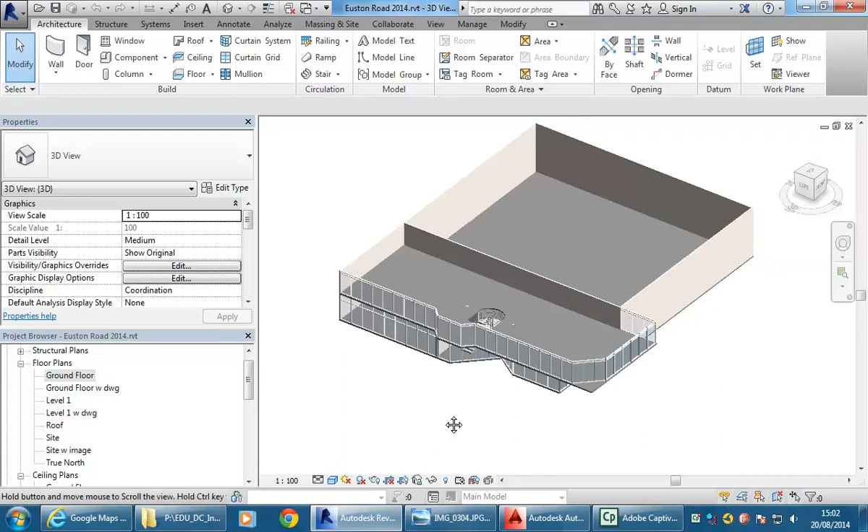Oh, sorry guys, over there, can you just keep it down, Priscilla. Sorry, I can't see. Just keep it down a bit.

Okay, so with the roof on, we'll have an enclosed space, and then you can go back and refine the details and correct everything that's wrong, and there's a lot wrong at the moment.

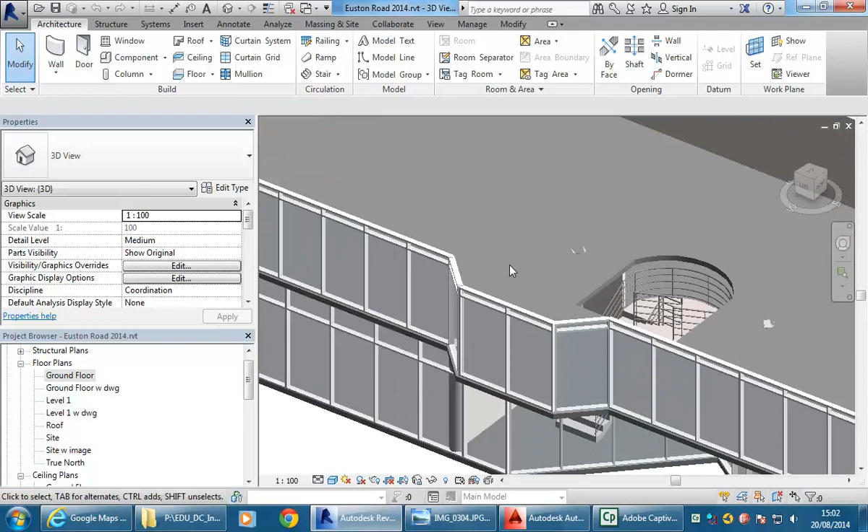The first thing you'll notice is that the walls coming out around the balcony shouldn't be there, so I'm going to delete those before doing the roof. You'll need additional walls set back from that edge of the balcony, and I'm going to go ahead and draw those in with the wall tool, again using storefront for now.

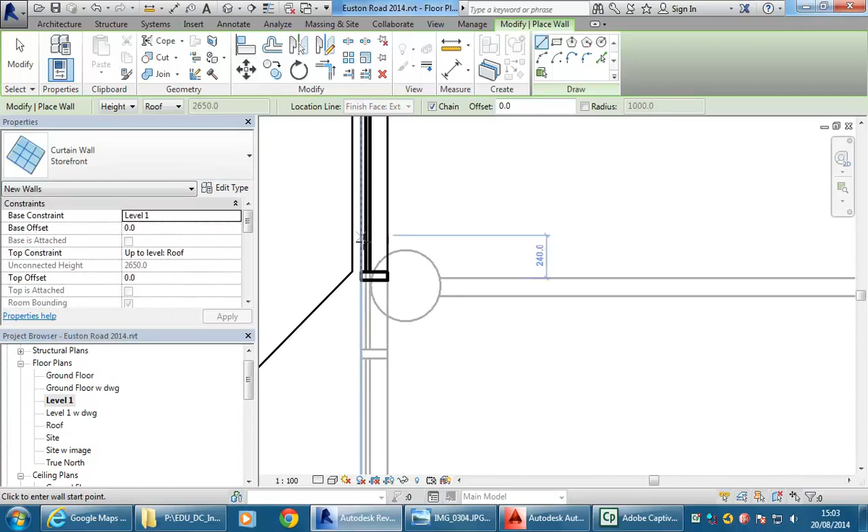We'll modify storefront to make it into the curtain wall you need in a little while, but for now I'm just going to draw from the end of my existing curtain wall, making sure I use space as necessary to flip the direction of that curtain wall.

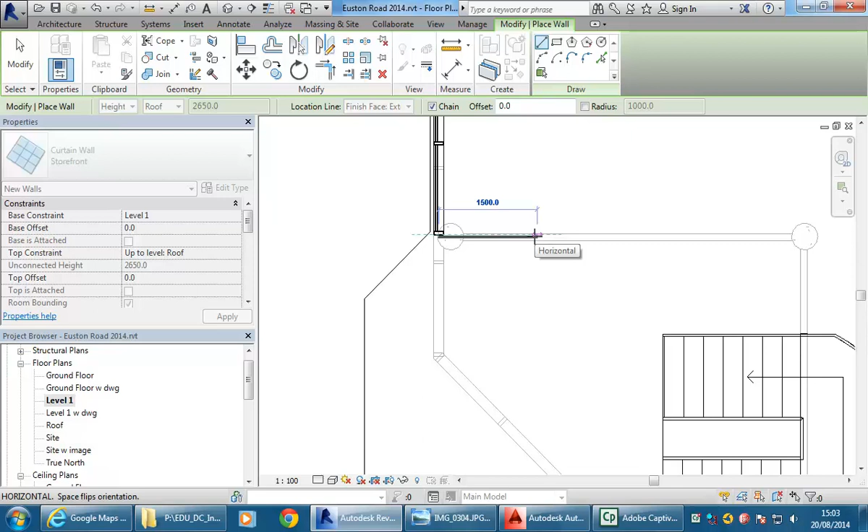Because we don't have any accurate measurements for this, I'm going to do it by eye. You can see it's roughly 1.5 meters set back from the front wall there, coming down and then back to the left, and that will help me with the roof.

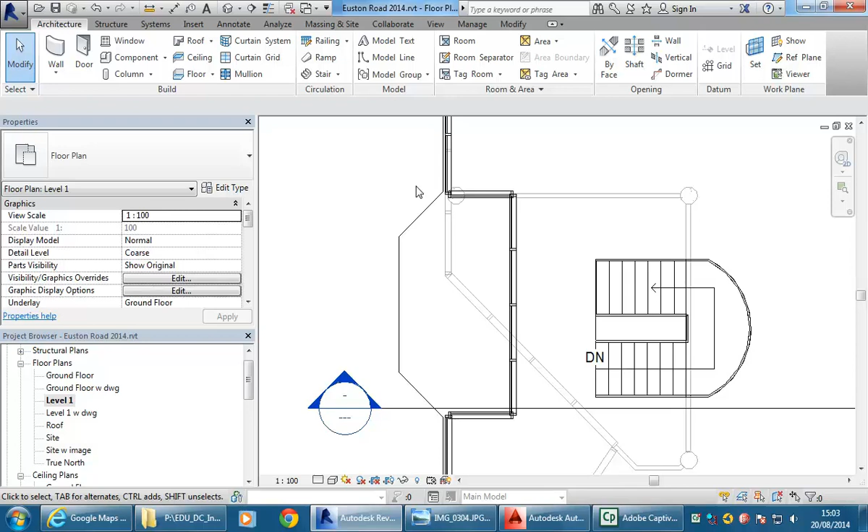Right, so while I'm at it, I might just show you a little thing with curtain walls, and I'll do a whole video on curtain walls after this, because I know you need to do quite a bit with those.

Maybe you're aware that with these curtain walls, when they join at a corner, you'll often see the mullions come up like this, and I don't know if I've shown you much with corner mullions. No, not really? No, good, okay.

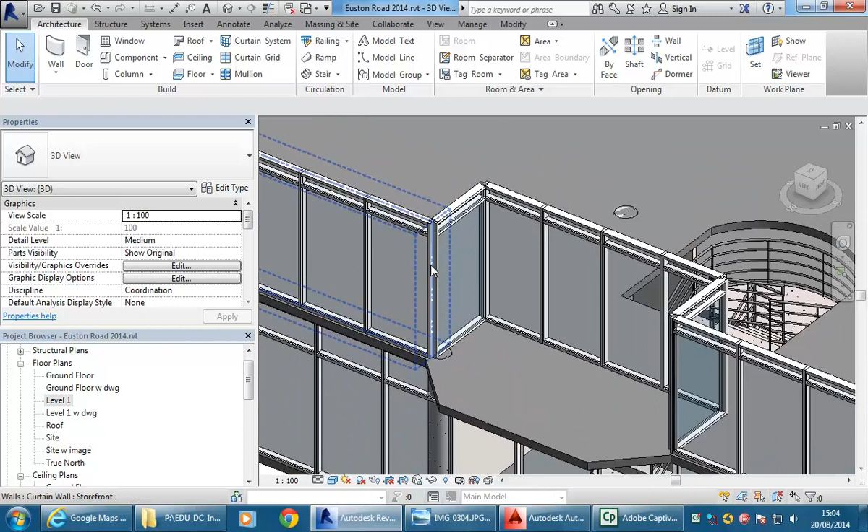So storefront, if you don't know, is a pre-built curtain wall set up with mullions and panels that are predefined. If you select any mullion, for example, you'll see it's pinned, which just means it's predefined as part of this storefront curtain wall.

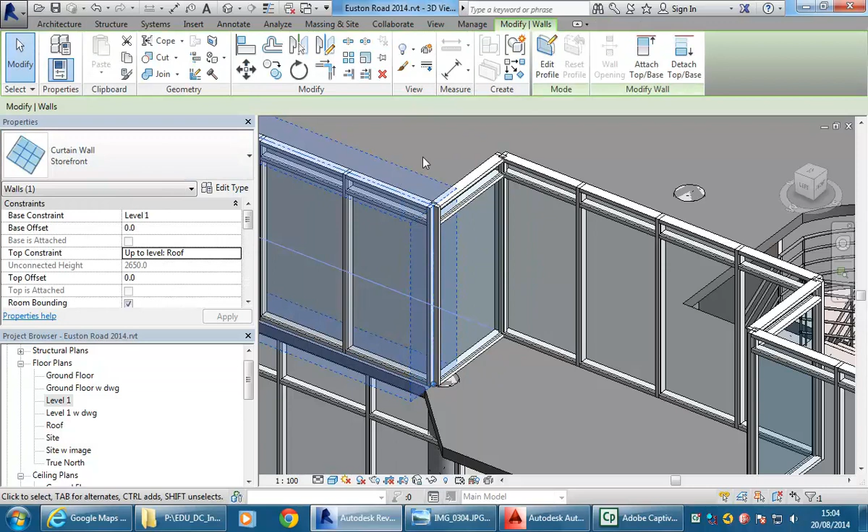Okay, so that's fine. I'll use tab if I need to select just the mullion, and I'm going to select the one above as well, using control to select that mullion in line with the one below. You can see they're both pinned - they come up with this pin icon.

So I'm going to unpin them on the Modify tab. You can see in the Modify panel it gives you this little pin icon with the cross. That means I can then modify them, and I'm going to delete them - with the delete button, I can take those two mullions away.

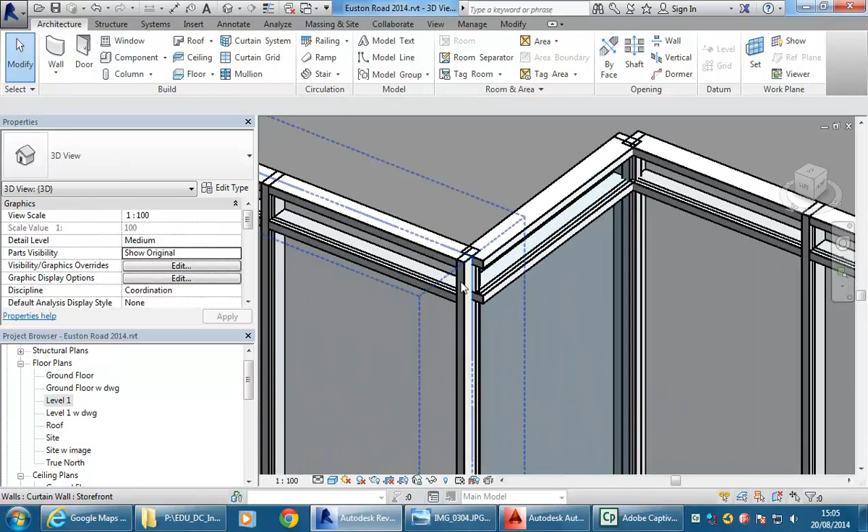So now I'm just left with one mullion on that corner. Then I'm going to select those mullions that are left - again, use tab if you need to highlight the one you want before using control to select it. And again, they're pinned, so I'll unpin them.

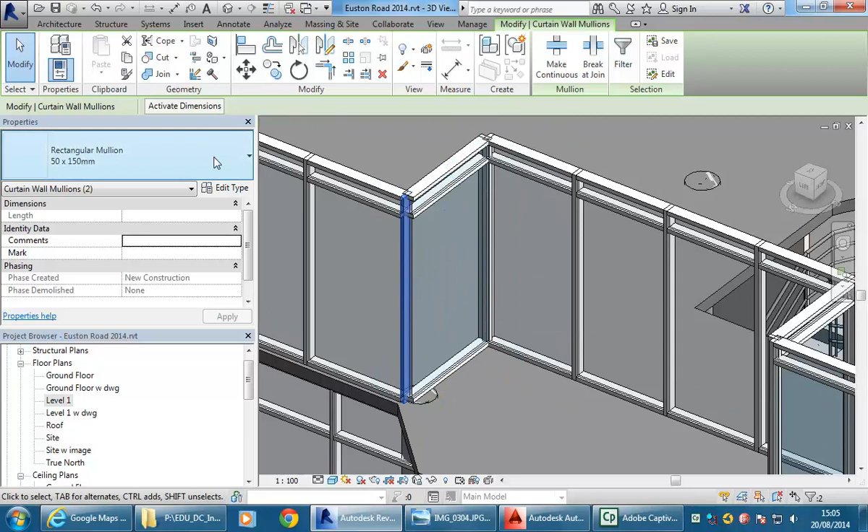Now, instead of deleting them, I'm going to change them in the Modify panel to a corner mullion. You'll see there's a quad mullion option. And now it joins correctly, and you can do that at any corner.

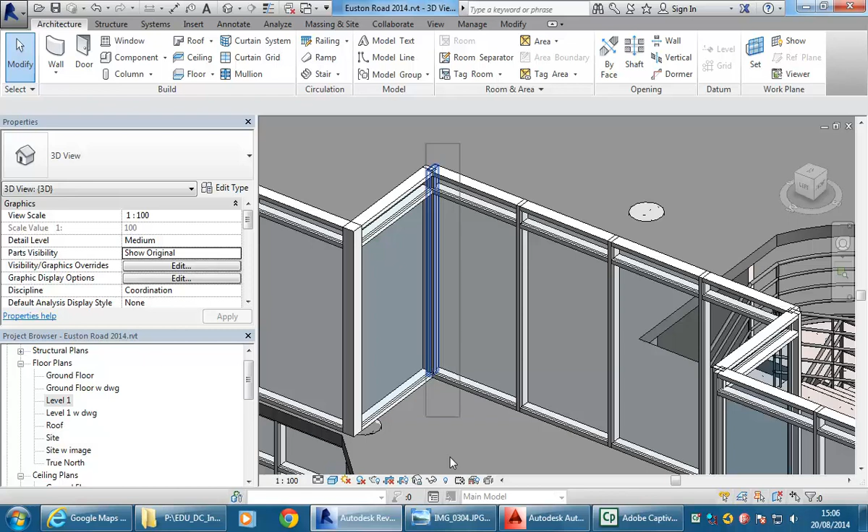So I'll do it a bit more quickly with the next one. It's much easier usually to select with a window to get the mullions you need on a corner. So I've got two mullions there - unpin, delete, selecting with a window again, unpin, change it to a corner. Any corner you can usually fix fairly easily like that.

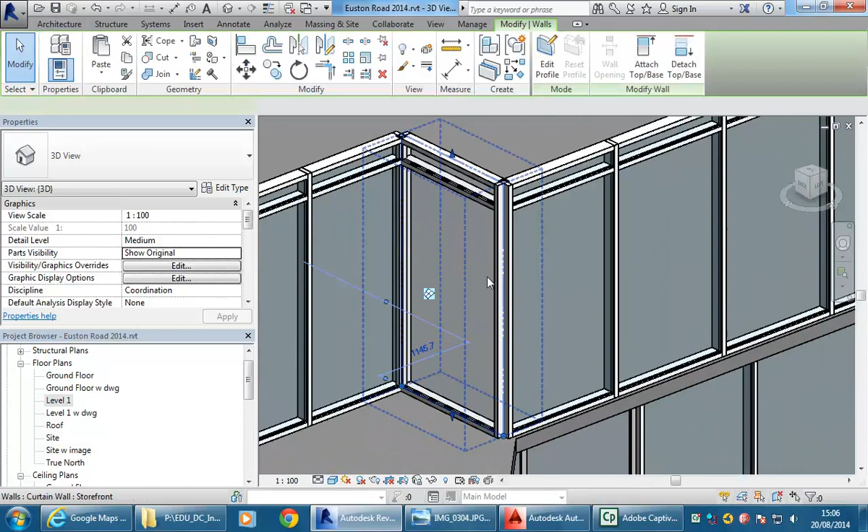Okay, so one more time - just making sure I just get two of them, not four, since it wants to give me four. There we go, two selected, unpin, delete, get the other two that are left, unpin, and change them to quads.

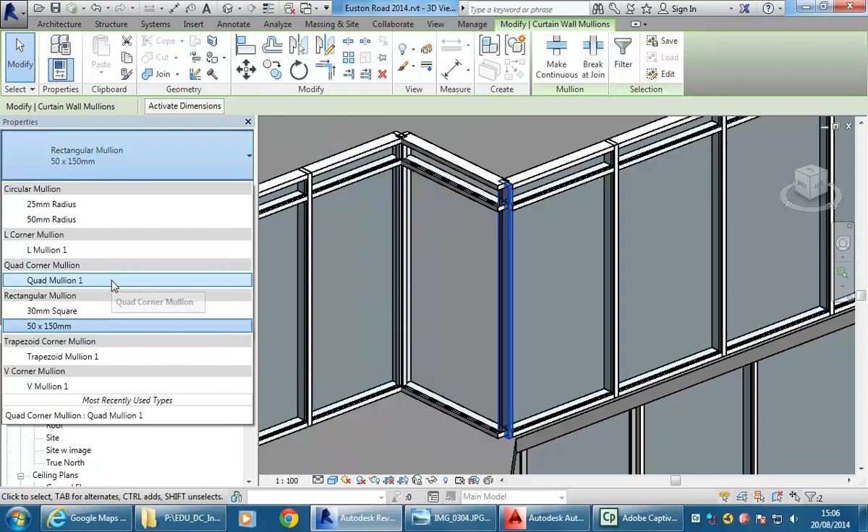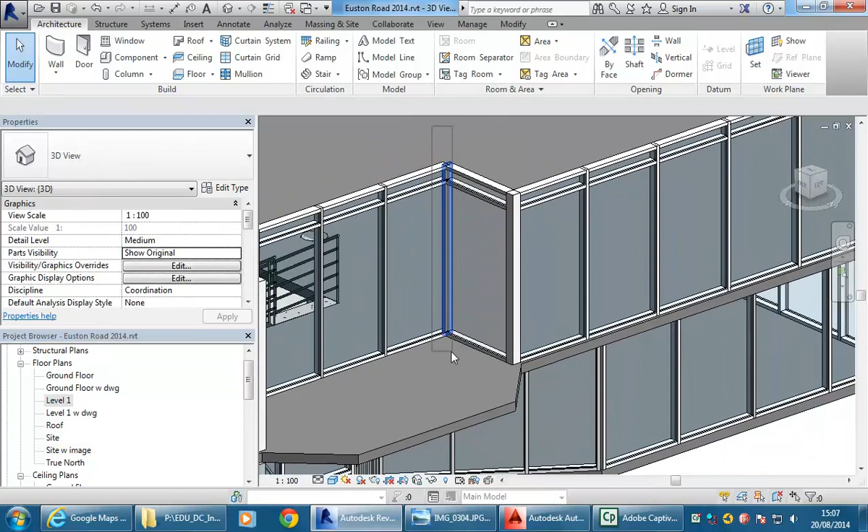Maybe one last time - delete. Okay, so with the two that are there, unpin, and now I can change it to a quad. So you can do that on the corners, on all of the joins of those walls.

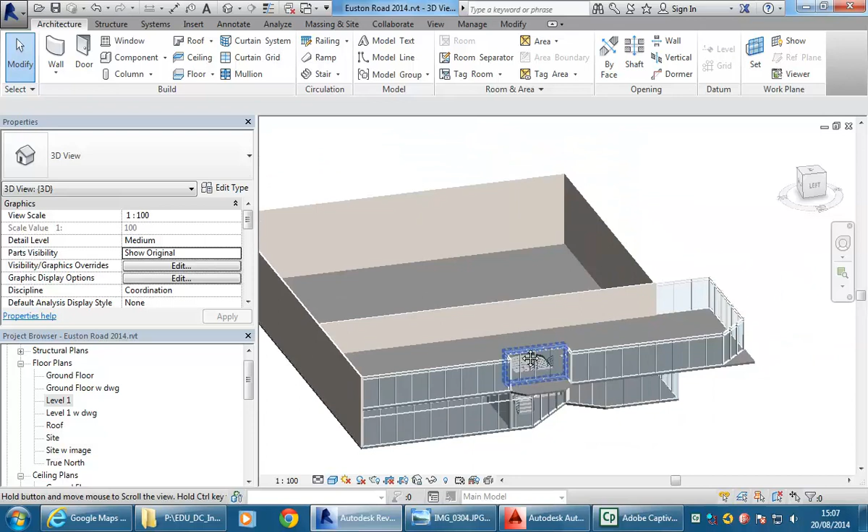First I'm just going to model it all as one piece. Later on we'll maybe turn it into a true parapet with the part behind set down with another roof behind it, which is the way it is in reality. But because this is an interiors project, you're probably not that focused on the outside of the building anyway, so the main thing is just to get the basic form modelled up to begin with.

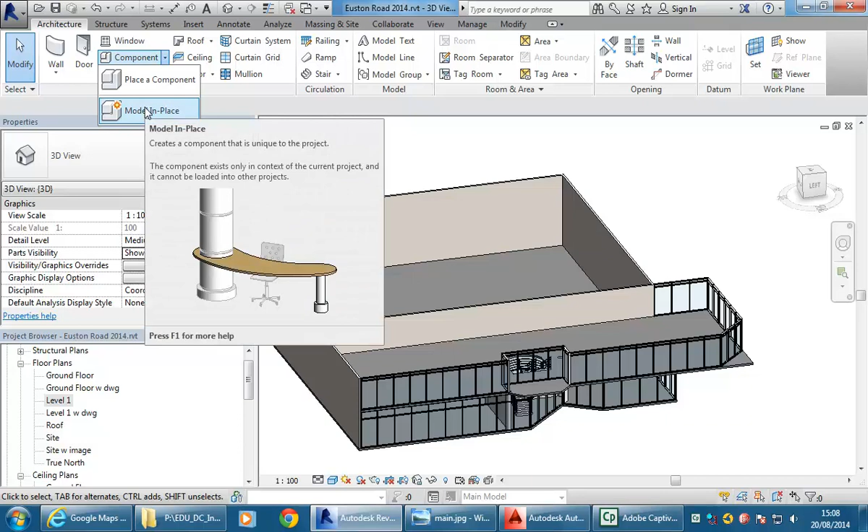In Revit, you have all these different roof tools, but unfortunately none of those are going to give us the kind of roof we want, well, not without a lot of work. So instead of using that approach, I'm going to suggest you use model in place - you're already pretty good with that, you've done a whole subject really using that modelling approach, so hopefully you're pretty comfortable with those tools.

I'm going to start by going to the roof level, my roof floor plan, which should have the walls greyed out.

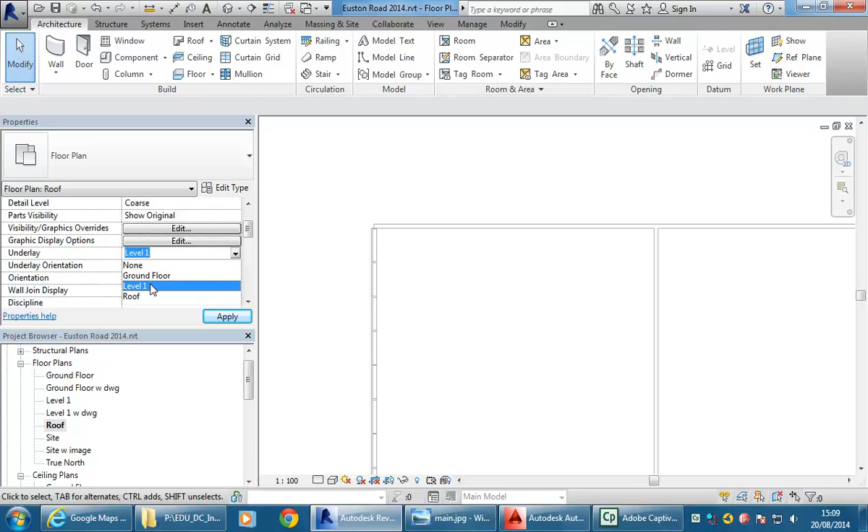If your walls aren't visible, you've got to change the underlay setting in your view properties. Check that underlay is set to the level below the view you're in. So I'm in the roof level, or roof plan, so underlay is set to level 1, which is my level below that.

If your walls are coming through in solid black, that means they're too high, and you can check all of this in your section view. You should see that the levels go basically in that order, with the ground floor, level 1, and then the roof. And the walls should stop at that level.

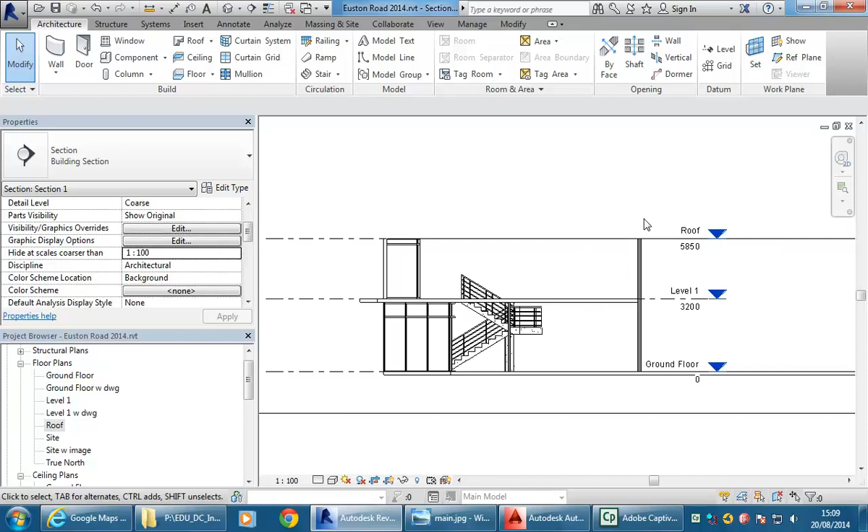If you've got your walls going through the roof level, you can always bring them down afterwards, as long as you're aware that they need to stop there eventually. So back into my roof floor plan.

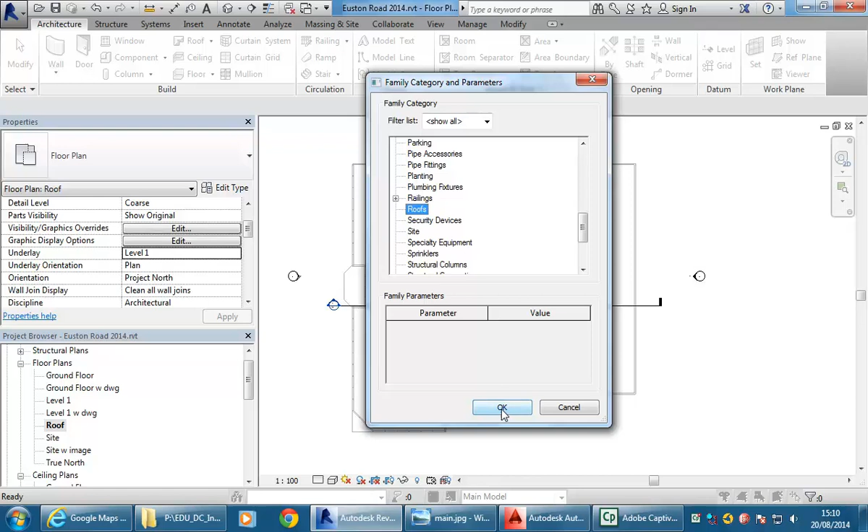Now I can make my roof, not using the roof tool, but using model in place. You can set the category to roofs, so as far as Revit's concerned, it's a roof, just like any other roof, just made in a different way. I'll call this parapet roof.

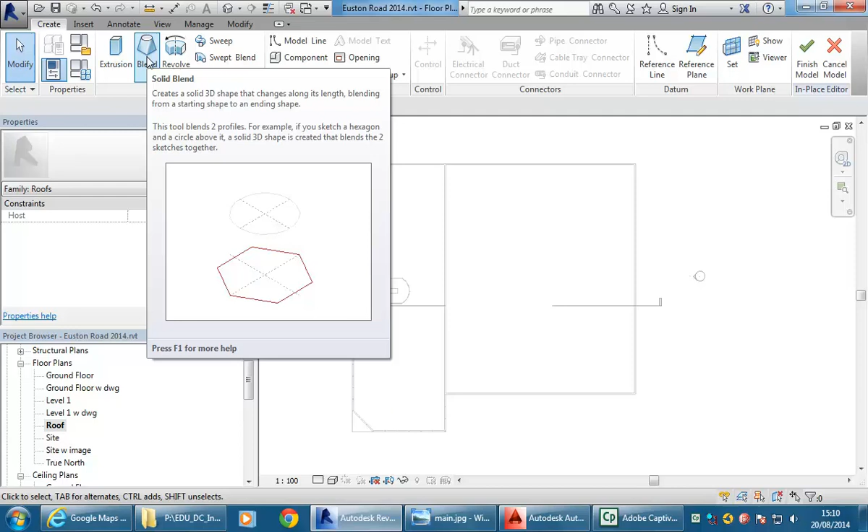Now I need to decide which tool to use. I'm going to use the blend tool to make the roof shape, but I'm also going to look at the photo just to get a better idea of the distances we need, and really the most important one is the soffit. Is that one you've heard before? Soffit, yeah.

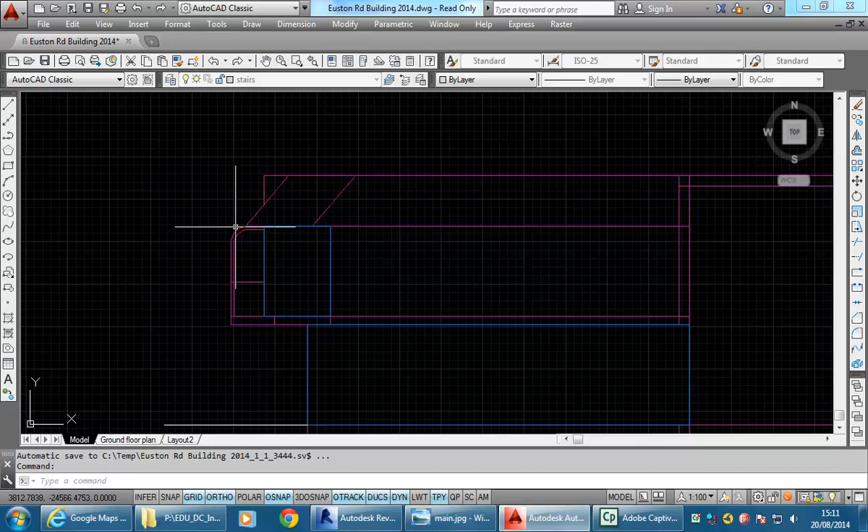The soffit is this, underneath the roof, under your eaves essentially, you have that lining, and that's your soffit. We need to know that distance, which is really our eave. That distance isn't given to us anywhere. We've got the AutoCAD drawing as a guide, but it's not going to help a lot there. Maybe we can measure just to see how it's been drawn.

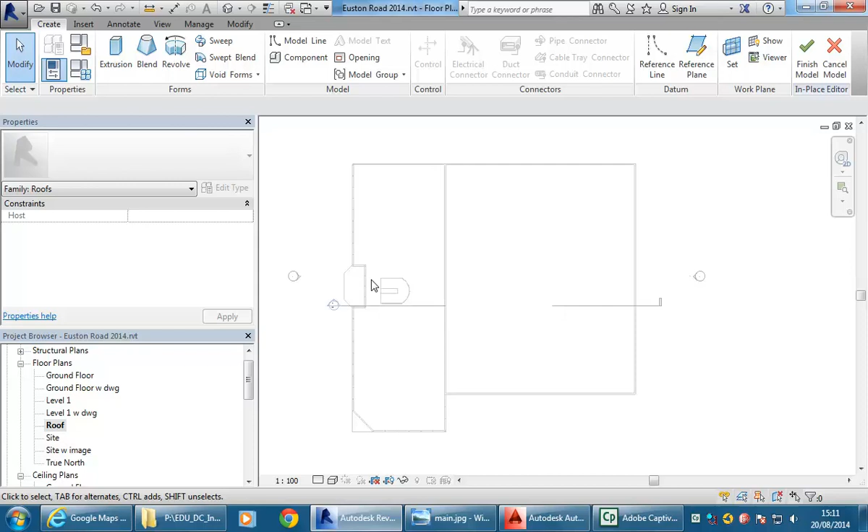So about 550, that's what I was going to say. It looks like it's about 600. Again, the great thing with Revit is, if we need to change this, it's an easy thing to modify afterwards. So I'll go with 600 as the eaves, or the soffit.

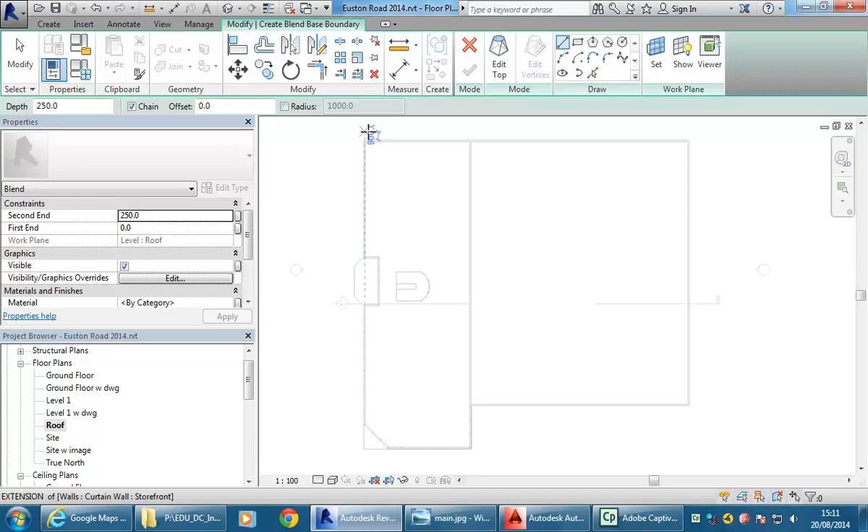Again, I'm using the blend tool. Just have a good look at the photos to get an idea of the form you're trying to make. You'll see, if you go through all the photos, that the roof does finish flush with the other side of the building, in other words, this edge up here.

Instead of drawing lines, I'm going to go to pick lines and pick that edge at the top. Now I want the soffit, or the eaves, to project 600mm from the front of my curtain wall.

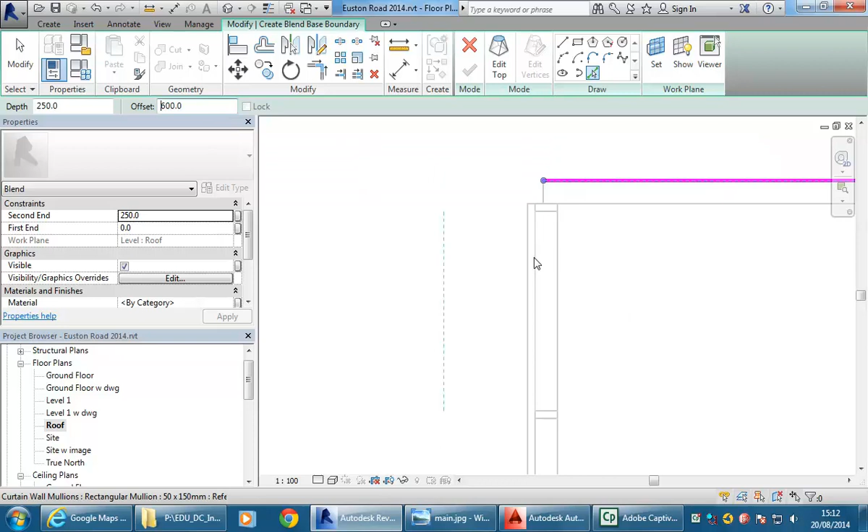I'm going to use still pick lines, but I'm going to put an offset in on the options bar, 600mm. Now if I pick the front edge of that curtain wall, making sure the line is going to the left, it'll give me that projection.

Now I'm going to pick one down the bottom as well. You'll see why when I go to join all of this together. So I'm going to pick part of the curtain wall right at that corner.

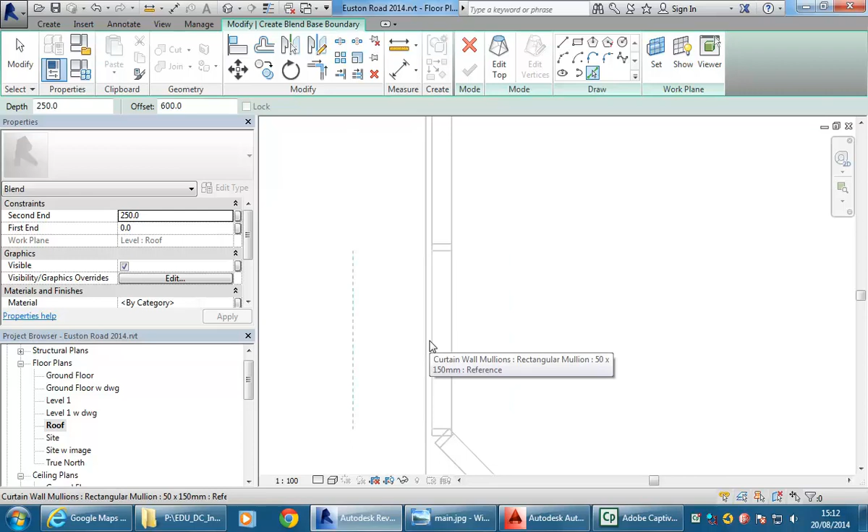Let's look at the photo again. You can see it comes around at the angle, still projecting out that 600mm, so coming again from the edge of the curtain wall, 600.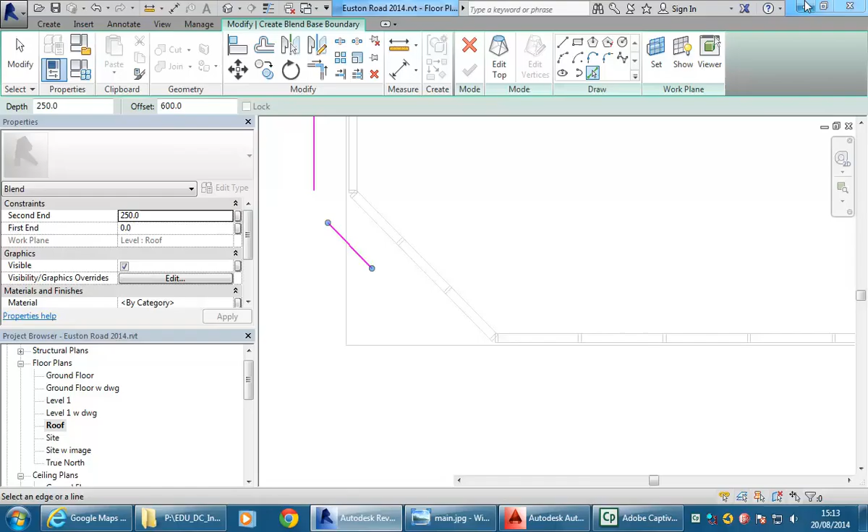I'm just going to assume it's the same all the way around, so down again to here, to the bottom, then it goes back and along the warehouse part of this building, or the storage area. So we'll just keep picking those different edges.

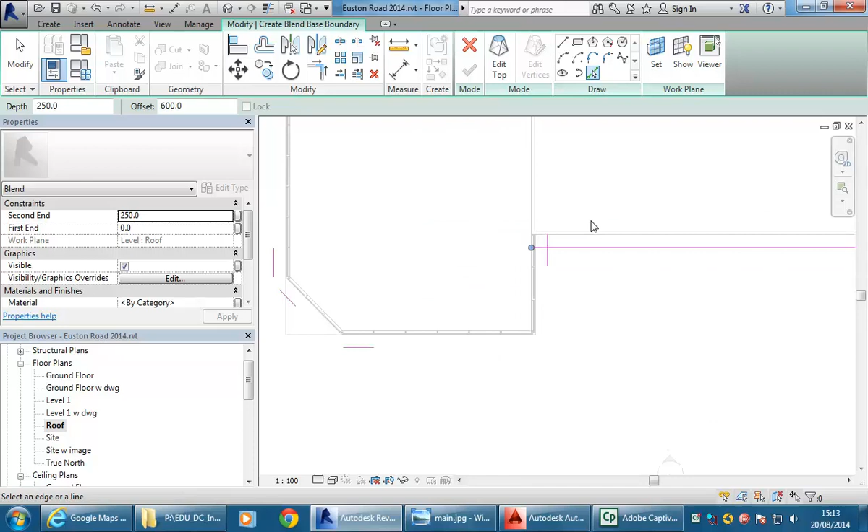I'm not going to go too much further than that. If you really want to, it's not a difficult thing once you've modelled up the front part of the building to copy it down the back if you want to have views that show more of the building, just to put it in context, but it's not essential.

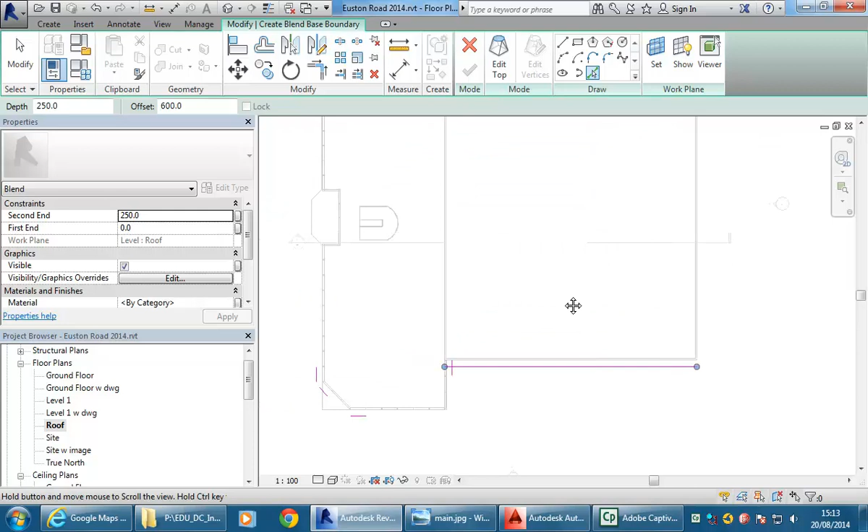So for now I'm just going to finish it at that point. I'm going to make the roof up to that point, in other words. Still need to do a lot more to finish it.

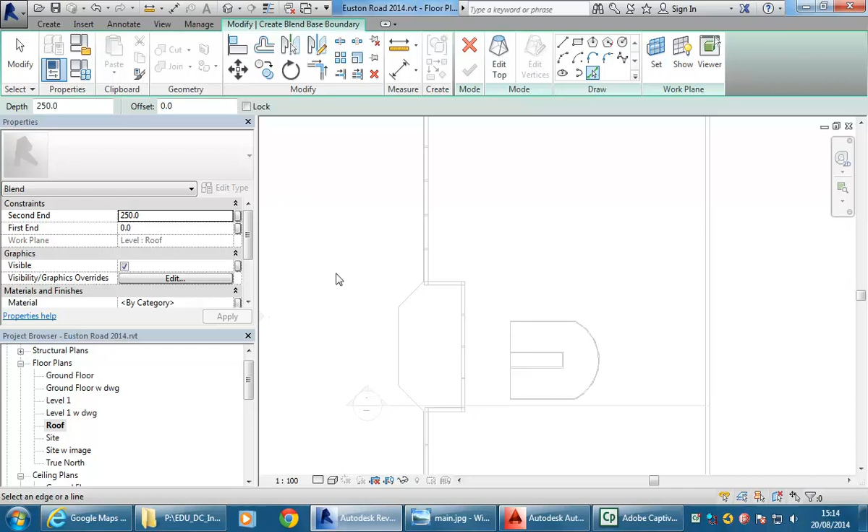I'm going to assume maybe, because I don't really want it flush with the wall if I can help it, I'll make that offset 100mm. And I'll pick the edge there and around the curtain wall I've made just previously.

Then now I will set it back to 0, just so I can pick the back of the building, because I don't really want to worry about what's happening there. I just want it flush with the walls. If you have a look around this sketch now, I've got an edge or a line on each side of the roof shape that I'm trying to make.

And I can then use trim to corner and join these together. What happened there? Oh, I went the wrong way.

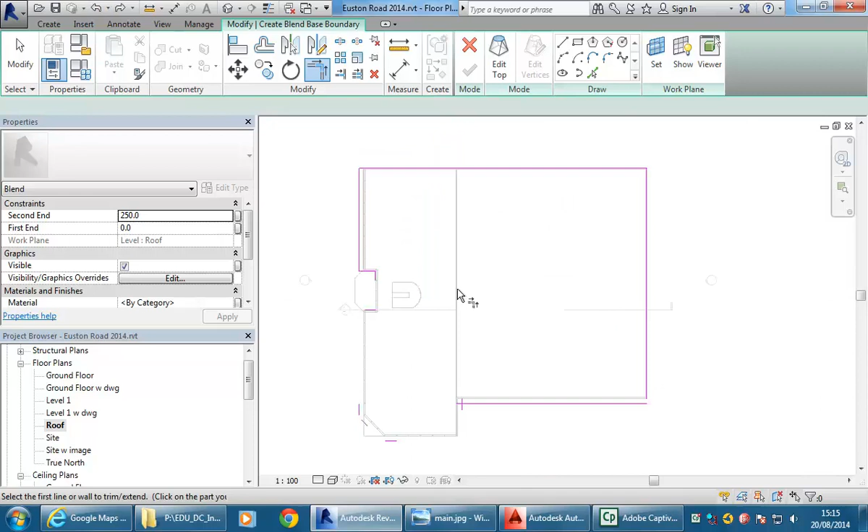Okay, so it's basically following the outline of the walls that I've already made, but again just thinking about how far it needs to project, and that's going to give us the tapering angle.

So then to make the top of the roof, the top edge, so just to make it clear what I'm doing, I've basically done the bottom edge of the roof now. Now I want the top edge, and that is essentially going to follow the line of the curtain wall, but maybe project out 100mm from there.

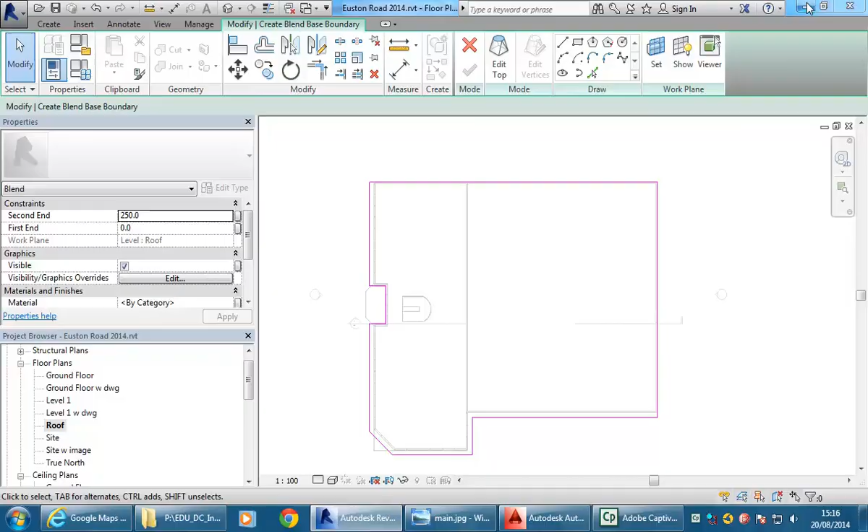Okay, so again using pick lines, I'm going to change the offset to 100 and just go around again making sure I pick the edge of my curtain wall, not the edge of the slab.

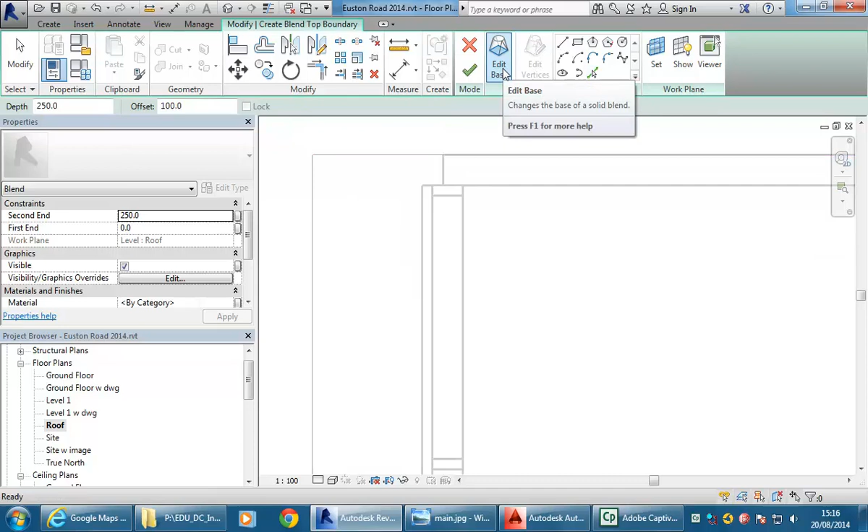Oops. Okay, so then to the left. Now sorry, I've picked it while I'm still in edit base, so I better undo that last one. You need to go to edit top to do the top shape or profile. Pick lines, and there we go.

So we come down. For this part, I don't want it to taper, so this edge here should basically sit right on top of the edge that I've made for the base.

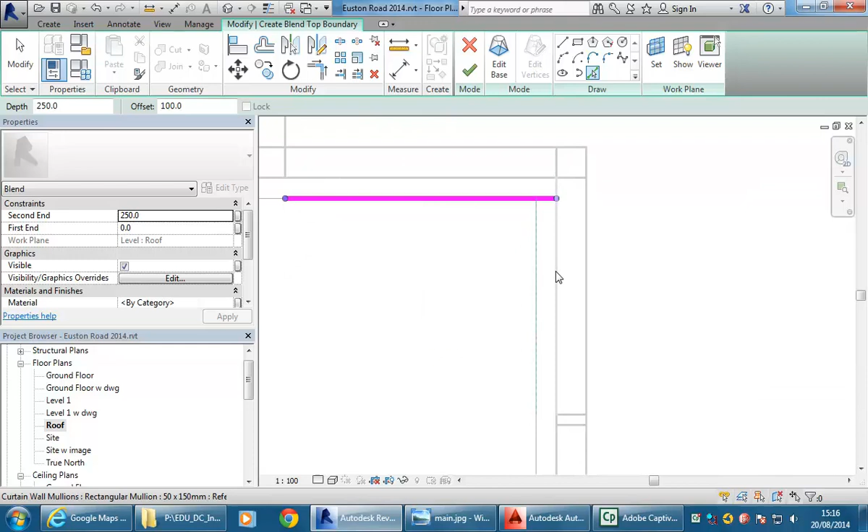And now I can see it will be confusing when you see the drawing of this, but when you see the finished product, it should be a lot clearer.

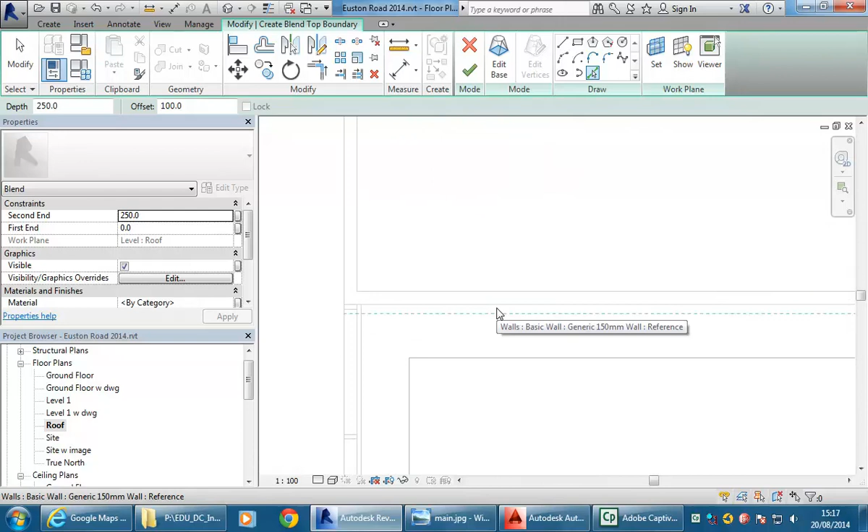Okay, so then to keep it consistent, I'm going to come out 100mm from this edge that isn't a curtain wall, but it has the tapering roof section above it.

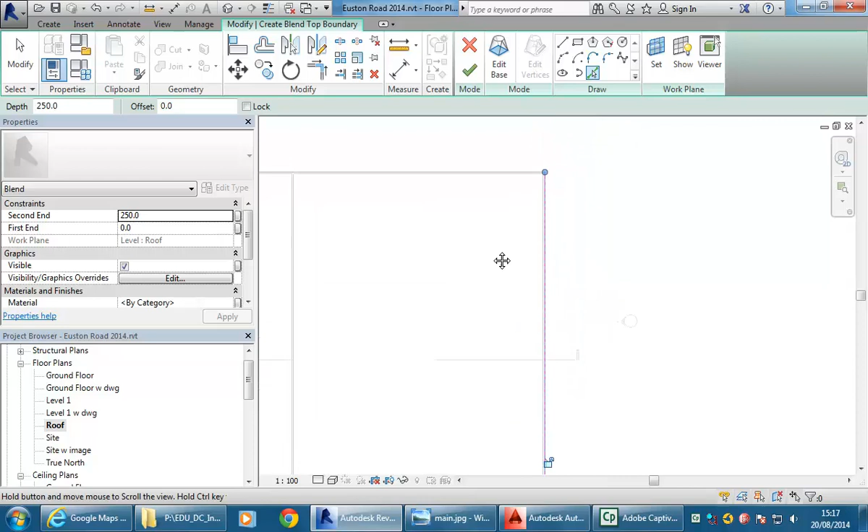And then for the parts where I don't want it to taper, where you just want it to be flat, you can pick the edge in line with the one below. So that's the same here. And there we go. So now with trim, again, you can join all of this together.

Yeah, exactly, yeah.

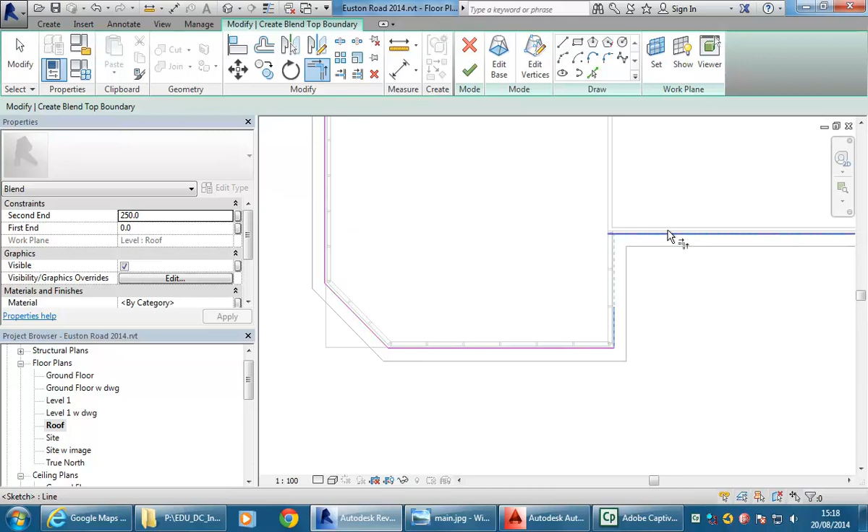Okay, so you can see then I've got this shape which is essentially offset 100mm from the base where we want it to taper, and it's going to slope along that distance.

And then you need to put a height in for this roof. So again, I'll use the AutoCAD drawing as a guide. It should be fairly close, so I'll just measure that distance. So 1500, that sounds about right. Look at the photo though to see, yeah, that sounds about right. You're not building the roof again, so as long as it's close.

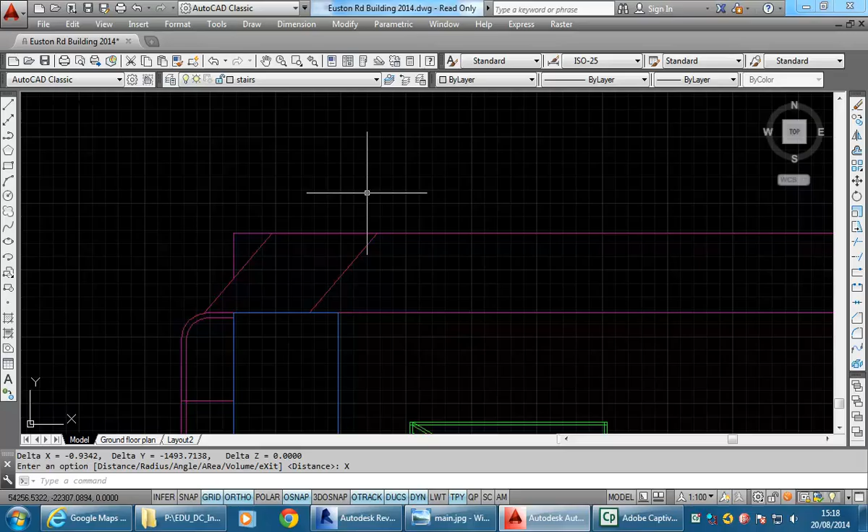Okay, so then in the properties, for the blend, you can put the second end as, I'll just make it a round number, 1500. Right, tick to finish, and that'll make the roof. So I'll have a look in 3D view, and you can see then this tapering roof shape.

Right, now, like I was saying before, later on we can look at cutting out the back of it so that it's a true parapet with the main roof recessed behind that. But for now, you could leave it just as it is.

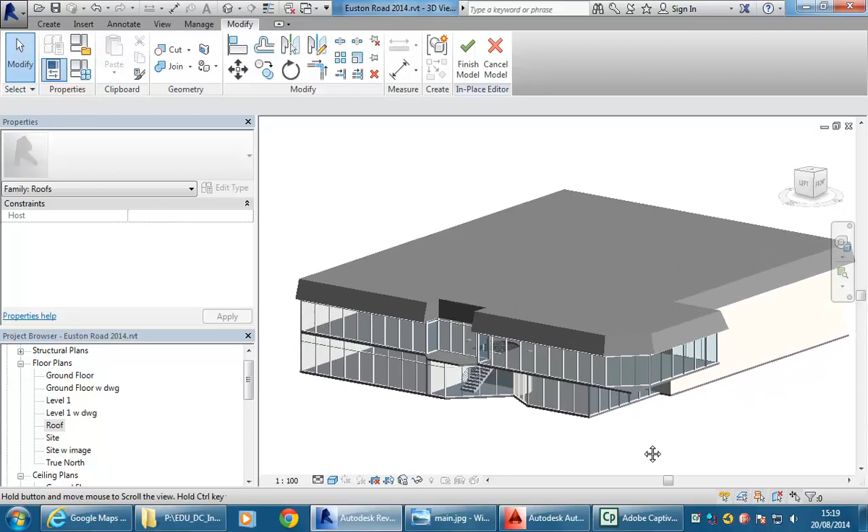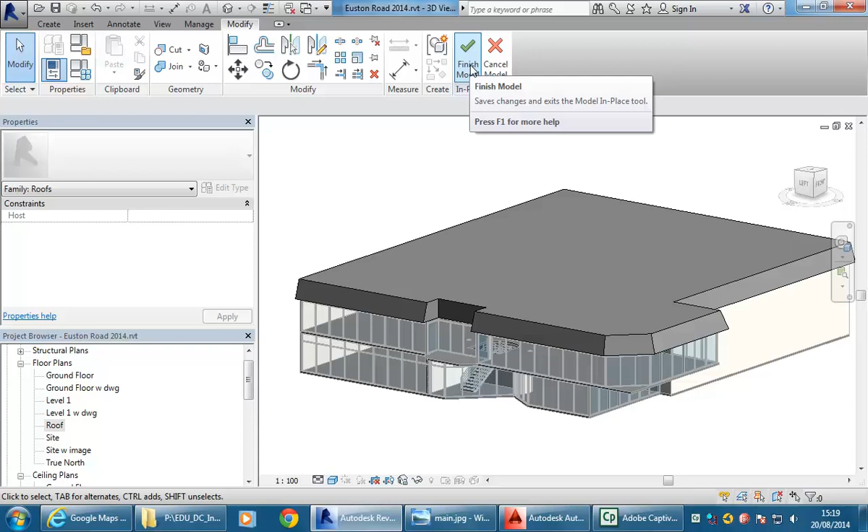So I'll finish the model. And then looking in the section view, that should look pretty good. So you can see there.

Now that I've got a bit more done, it's fairly obvious that I haven't done much with the right-hand side, so you can always crop your section to just show the part you're working on.

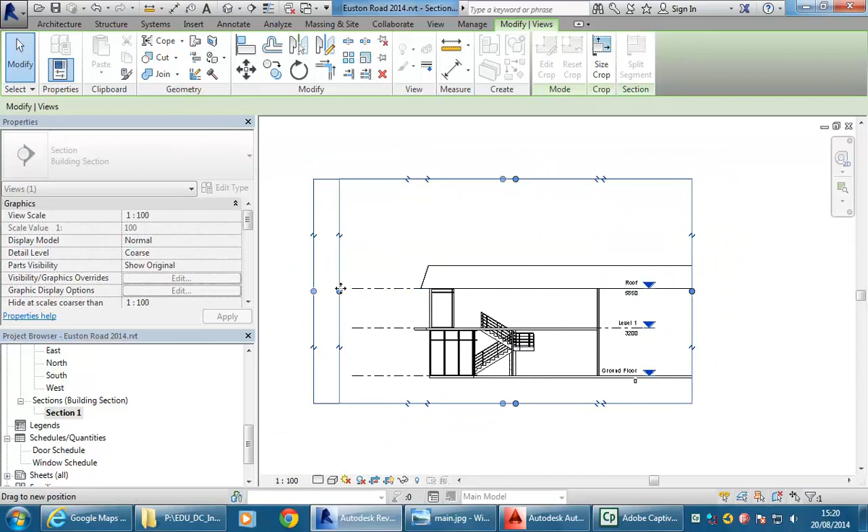Hide your section, hide your crop region if you like to make it a bit neater. And there we are. So you can see then the roof there, sitting directly above those walls.

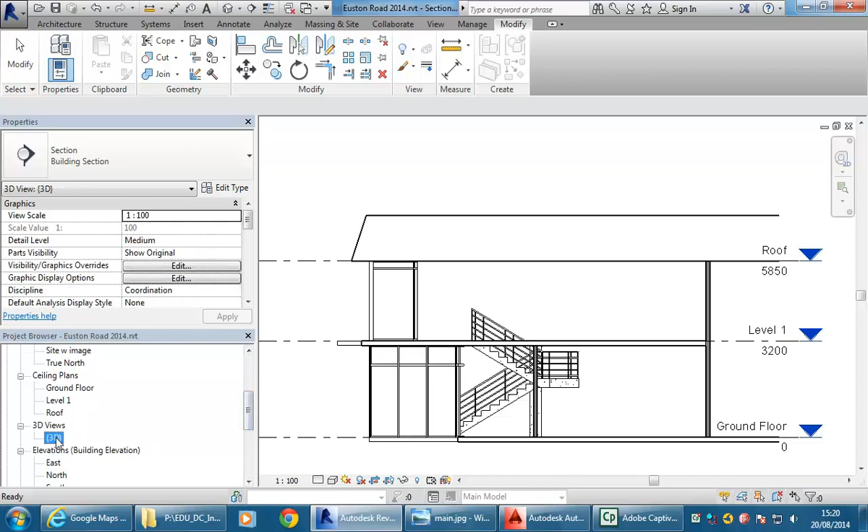And again I'll just show you quickly in the 3D view.

Making sure the columns don't go through, yeah, so right, it's an interesting building, this one. Anyhow, we'll look at the structure later. I don't want to get too far into that, but it's got an interesting structure, to say the least.

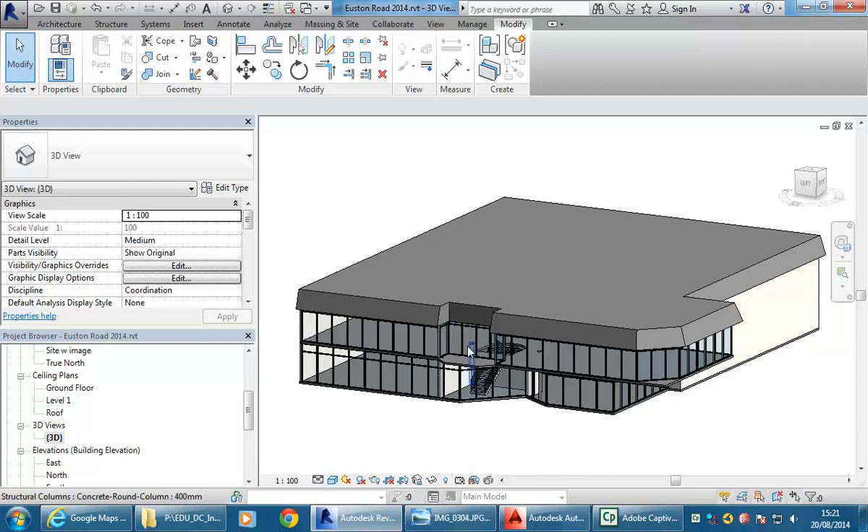Well, maybe just one little thing you can then just have a look at what you're going to do with the balcony there, and decide if you're going to put the canopy over the roof that you can probably pick up in some of those photos.

You can just about see it there, but in some of the other photos you can see it a little bit better.

Now, it's behind the trees there, there's a canopy. You've probably seen it more than I have.

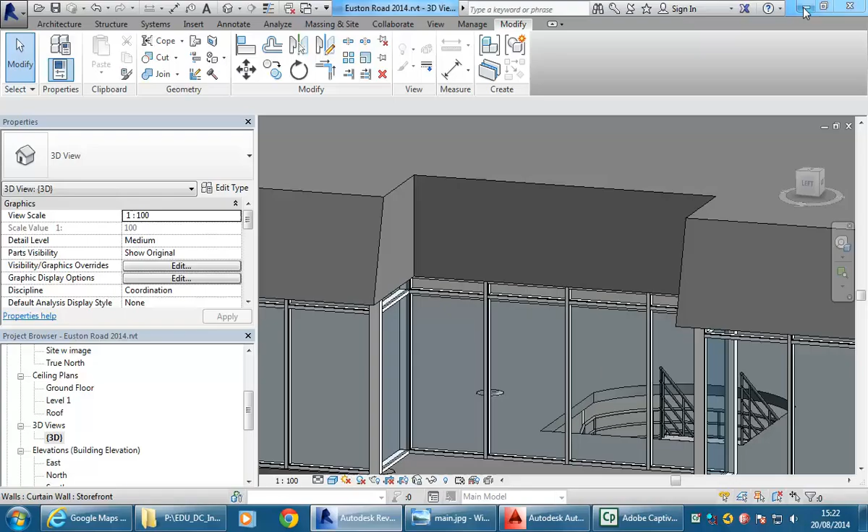There we are. Okay, so that maybe will give you an idea about the canopy, but that's optional anyway. So for now, as long as you've got that basic form done, that's really good. And so anyhow, I'll give you some time to do that.